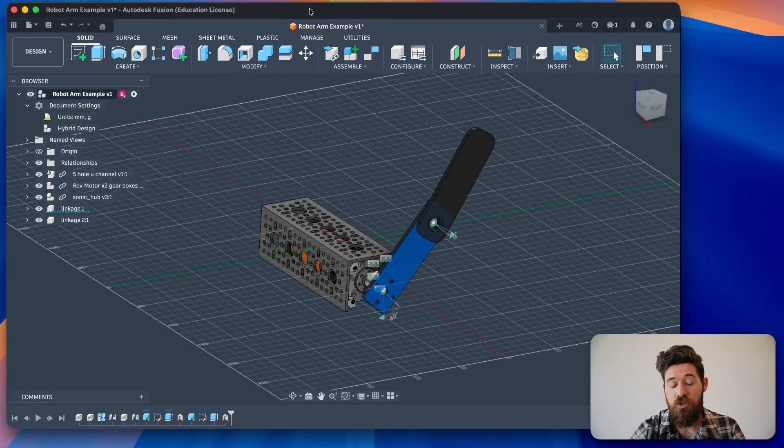So the goal for today is to be able to make something along these lines, and how these components are interacting together are working with things called joints inside of Fusion.

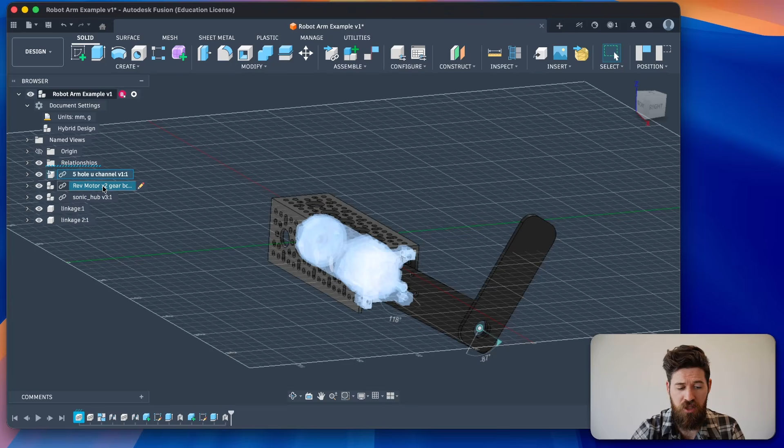So if we're looking at our design here, we can see that there's a couple different joints that already exist inside of our design. Inside of our browser panel, we have a metal piece here that holds the whole frame together. We have a motor that's able to rotate things around. We have a hub-based element here that is able to clamp our first bar of that linkage and then connect to that second bar of that linkage.

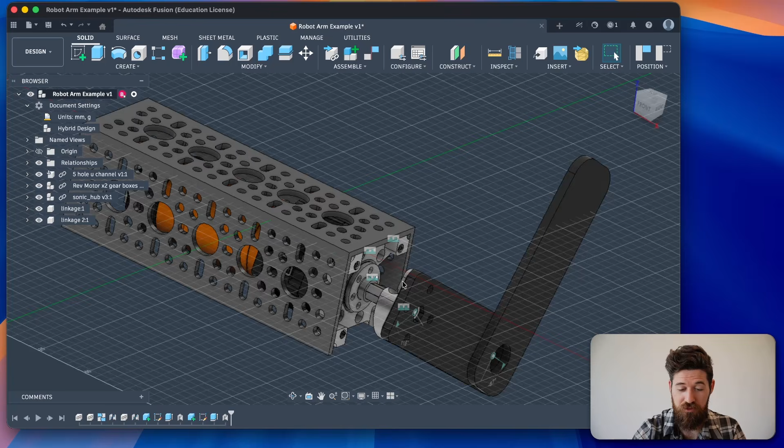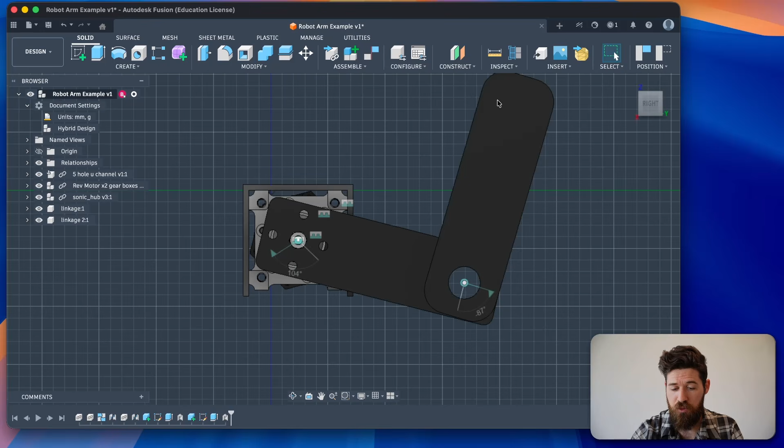Now, these components here are connected with something called a revolute joint, or a rotational joint. And we can see that when we look at our position here, we can see our angle for our revolute joint. As we rotate this around, we can see that little angle number changes as we rotate around that joint. The same is true with our other revolute joint here, where we can click and drag this around, and we can see again that angle changes depending on how those two are connected together.

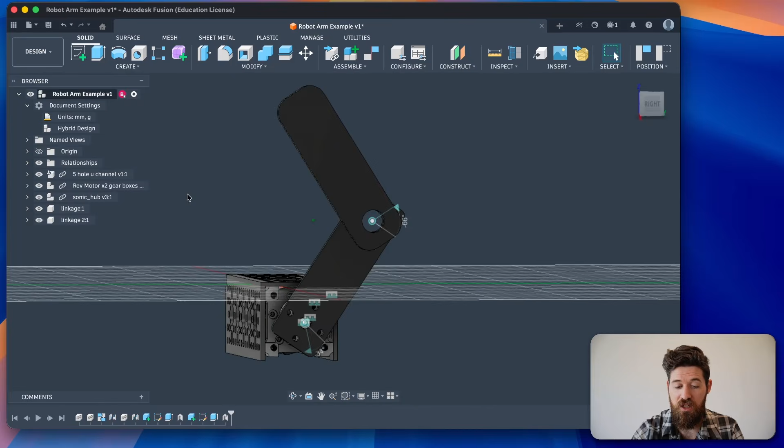Now, because I have two revolute joints and we move this together, we can actually see, and Fusion will model for us, how these two objects are going to connect together if I were to keep these things inside of this main plane. You'll also notice as I rotate this around that this sonic hub right here in the middle also stays and rotates as I rotate that top joint.

So let's talk about how we actually move this. The first thing to know about working with joints and components as you start to make larger assemblies is that you always have to have some sort of component that is grounded.

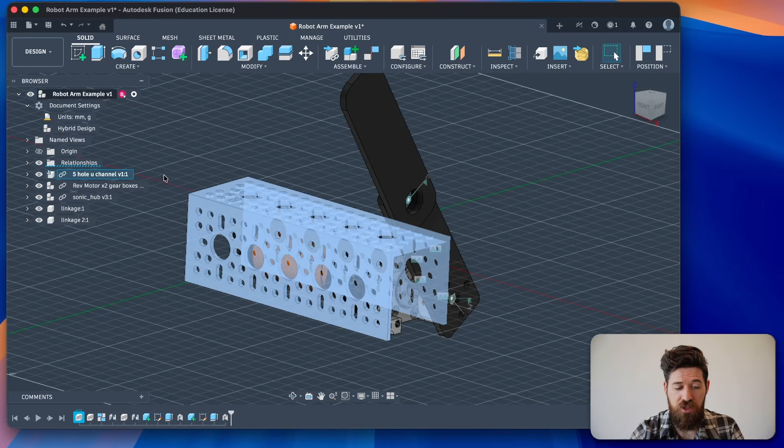You'll notice that there's this little anchor symbol next to this U-channel piece. This piece of metal, which is our U or C channel, is grounded, which means that if I were to click my little home here, there is one piece that will never move, and that is the parent object, so to speak. We will never be able to move that object around, and everything is going to rotate and move relative to that grounded object that will never actually move. So you always have to have something grounded inside of your object or your assembly.

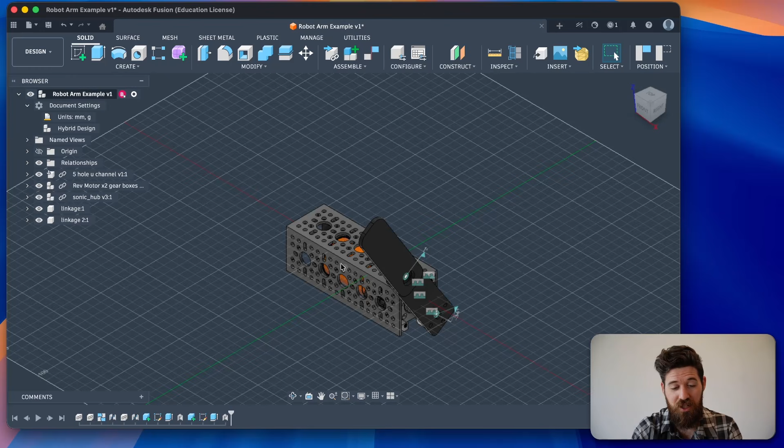The next thing to know about this is that all of your objects also need to be components. You cannot add joints to simple bodies, so we have to make sure we're adding those as components instead.

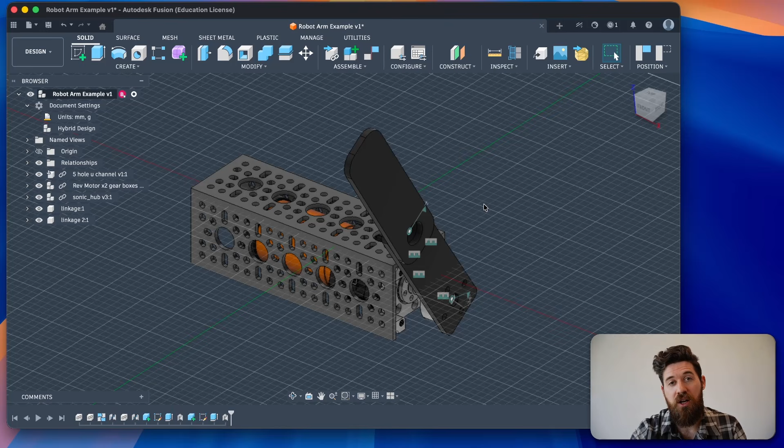So let's go ahead and start making some of these. If you want all these files for these individual step files, I'll link them in a file in the description down below so that you can build along with me here too.

I'm going to start by making a new design, and we're going to make a hybrid design because in this case we are not making an individual part, we're not assembling pre-built parts, we're also going to be building some of these. This is kind of classic Fusion design as well. We'll go ahead and save this first. We'll call this one a simple robot linkage, and I'm going to write a tutorial in this as well, just to make sure we got some good practice.

Now the first thing we're going to do is add in that solid piece of U-channel, and we're going to ground that inside. So I have it inside of my panel here, and I'm going to search for U-channel.

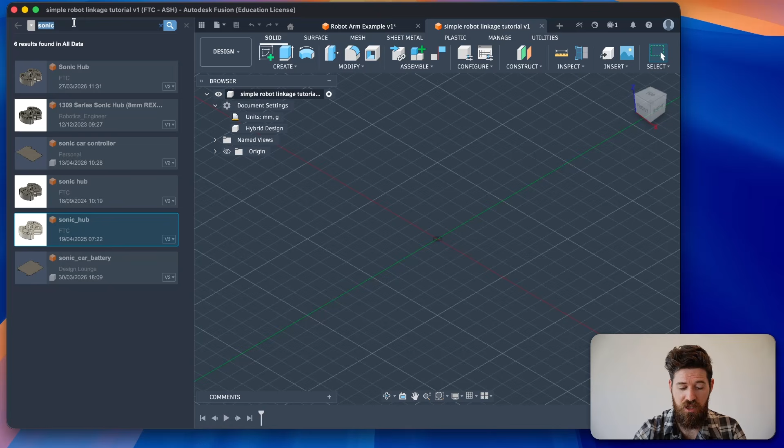You can simply do File and then select Open, and then save your file as a separate file here, and it will show up inside of one of those sections. Then we can right click and select Insert into Current Design. That will take one of those external components or previous components that we've made, and it will insert it into our object here.

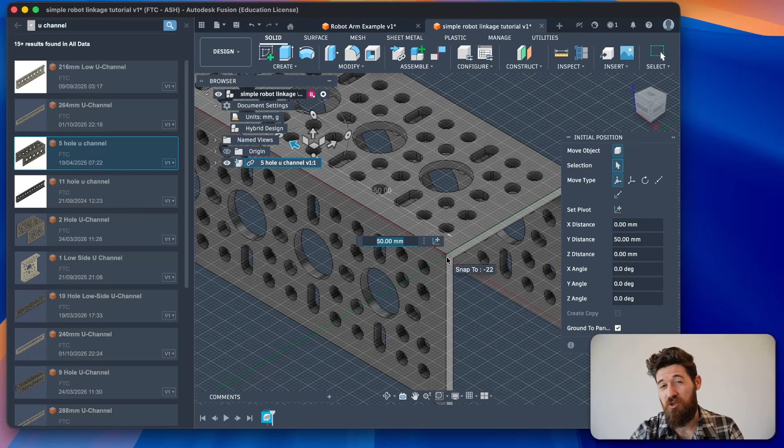You're welcome to go ahead and move this around as you'd like to get it inside of your current position. There are 3 slider bars here for the Y-axis, the Z-axis, and the X-axis, and you're welcome to move this as you see fit. I like to line my first component up on the origin point here so that I have that central point moving forward. The closer you zoom in, the smaller increments you'll be able to move your objects in, and the further out you zoom, the larger the increments are going to be that you're moving your object in.

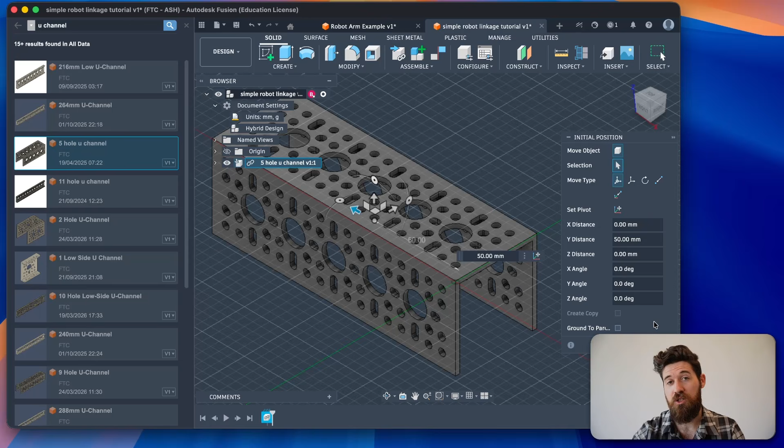Once you're happy with this, in our initial position, we can also simply ground this to the parent, but I'm going to not select that box for now. I'd suggest that you do, but on the off chance that you don't end up grounding this parent, and you're now able to move this thing around, instead what you can do now is select your object, select whatever face it is that you wanted to, and then right click on the object and say ground to parent.

And that will hold it inside of that specific position that you want. And now if I try to click and drag this around, you'll notice that I cannot move or manipulate this object anymore, which is what we want. So this is our base reference point for our design. It's up to you to decide what you want your base reference to be.

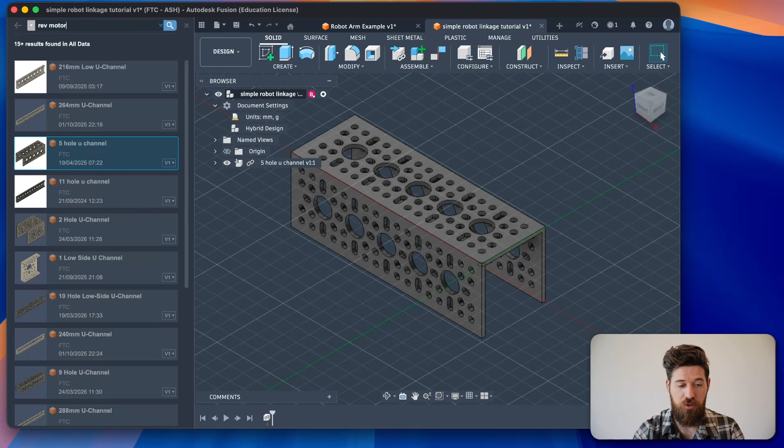Now inside of this piece of channel here, we're also going to add in a motor. So I'm going to search for my rev motor, because this is what I've put in the files down below. I'm going to grab this one here, and right click and insert into the current design. Again, if you haven't uploaded that folder, make sure you do that file upload to the folder. And for this one, we can just move it clear and out of the way for now.

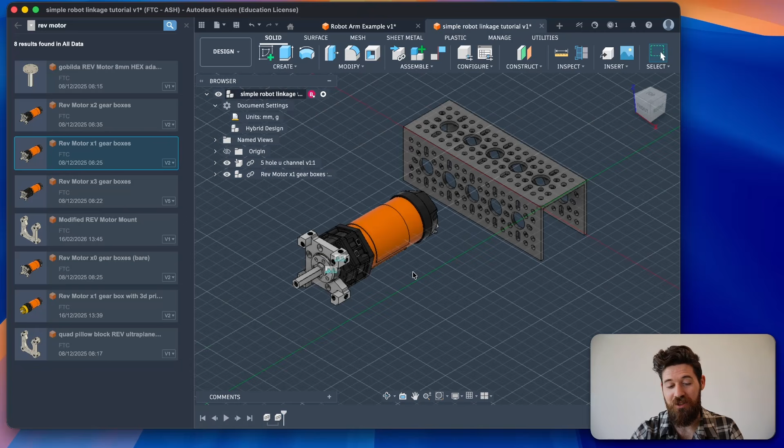And we're going to make sure we do not select ground to parent, because otherwise it will ground it inside of this position. Now before we start moving a very large object like this - this object has a whole lot of pieces in it - and for our example in this design, none of the pieces on this motor here are actually going to move.

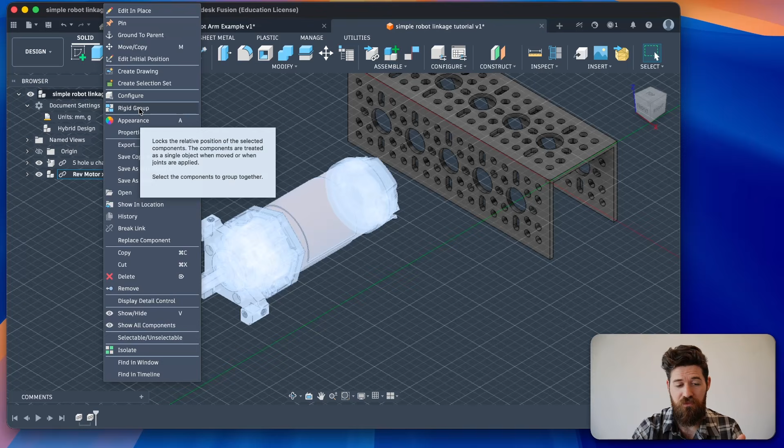So before I move this in, I'm going to right click, and select rigid group. Now what a rigid group does is it locks all of those joints and all those individual pieces inside of that component together so that they don't move around. What ends up happening is it's going to constrain selected components - this is okay, select yes, and then select all right. So now this entire component now acts as an individual object.

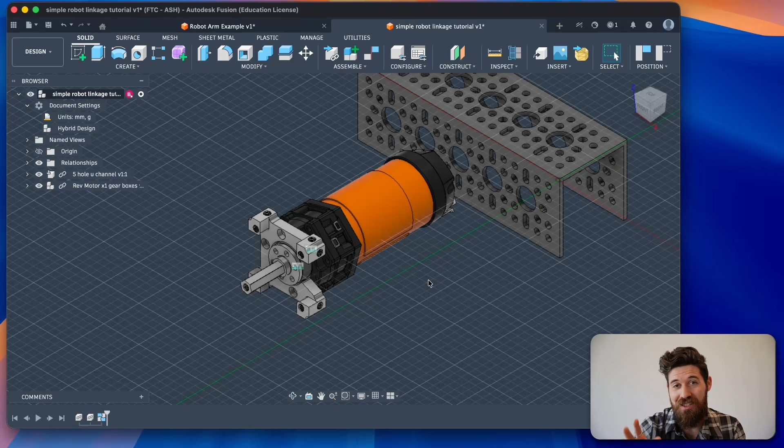If you did not make it a rigid group and you were to start adding in joints and relative geometry to these things, what's going to happen is that you're going to move individual pieces from that. So for example, you might grab just this drive shaft, or you might grab just this cap, and you'll end up blowing apart your component, which is not what we want.

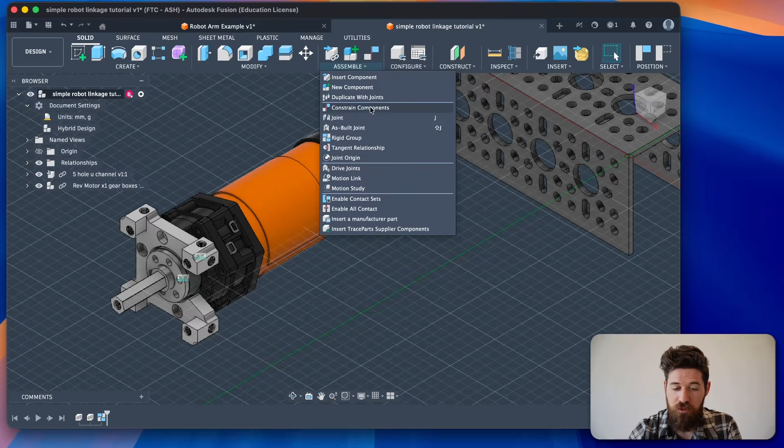Now let's get into joining these two pieces together. We want some way of relatively moving these things together at the same time, and we're going to do that with a simple joint. So if I select Assemble and I select Joint, you can also press J on your keyboard to open that up. Now we can actually start finding ways to join things together. We can join things on faces, we can join things on points, we can join things on edges. We can also join things on snap geometries, and we'll talk about all of those.

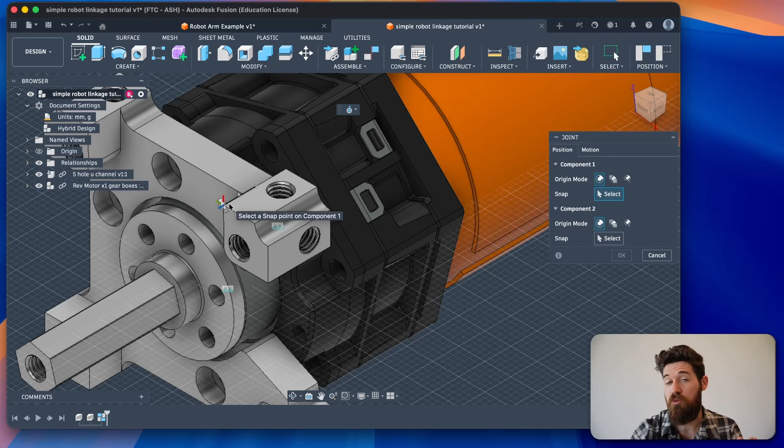So let's say, for example, I wanted to join this face here onto another face. I'm just going to select this face, and we can see that there's this little snap point origin that's popping up, because Fusion is smart enough to know that you probably want some sort of reference point on your geometry for where you want to actually do that joint. So I'm going to select this top left-hand corner. It's going to keep it in this orientation. And then I can move over and select a different position that I want it to snap to.

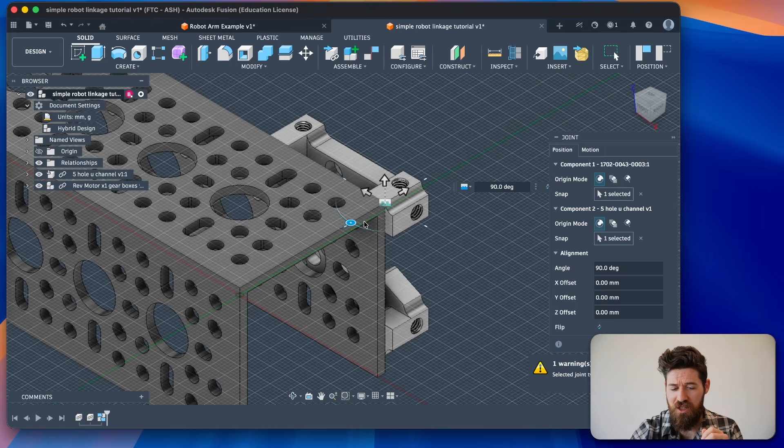We can see that right now, mine is currently doing a revolute joint, so I'm going to swap this back to rigid. Yours is likely going to be rigid at the start, we'll talk about that in a second. So now as I move this in, we can see that I can actually rotate and move this joint around as it is that I want to.

You can also have joints move in different positions. Now, in this case, I actually don't want to snap those two together, so I'm going to remove both of those because there's an easier way for me to joint these two together. I'm going to select one of these holes here because these are lined up with my pattern.

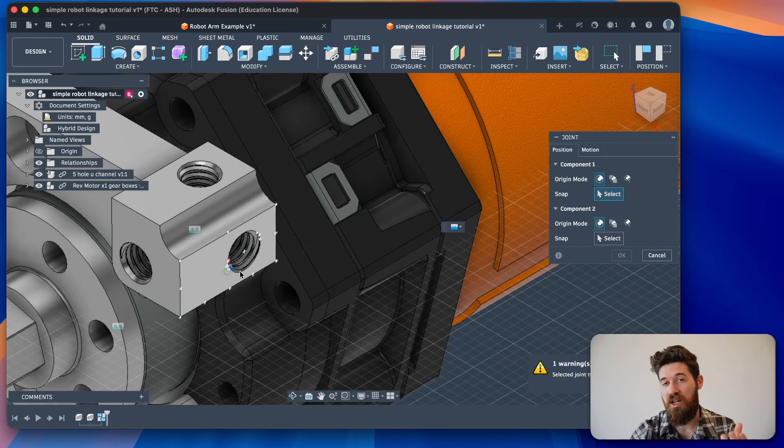And if I select the edge of this ring here, or this circle, what ends up happening is you can see that rather than grabbing one of these threads, I can move it over, and we actually see that snap origin point goes into the center of that hole, which is what I want. I like to work center to center, it makes life a lot easier.

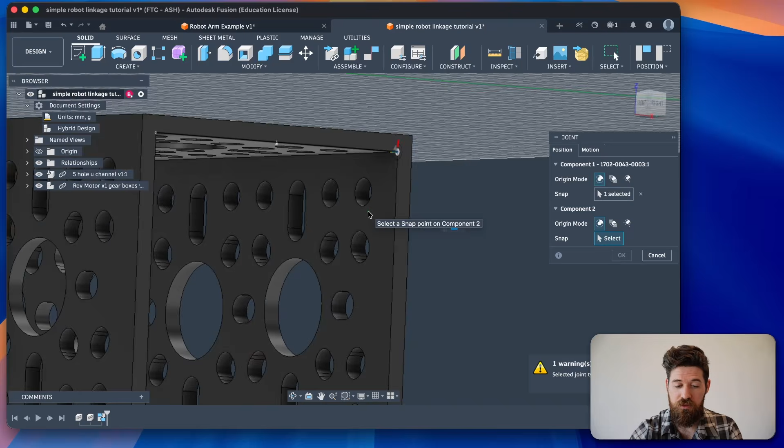Now if I come over here, I change my view angle, and I select, again, the center of this hole here by grabbing this edge. You may need to move your mouse around, or you can click and hold, and you can select different sections until you have the point that you would like to select to. And this is, I'm pretty happy with where this is actually going to go. You'll notice that it's only going to move that individual component for now, and that's okay. The whole rigid group is going to come on with it later.

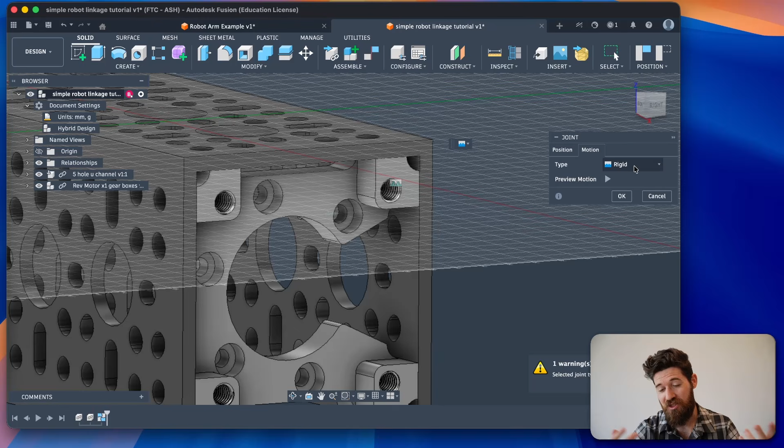Now when it comes to the motion, I'm going to select motion, I'm going to select rigid. Rigid is they're going to lock the two components together because those are never actually going to move, because we're going to add some fasteners in here later. They're never going to move. You can click this little preview and it will show you that, hey, those two objects, if you were to shake and vibrate them all around, they're never going to move. We don't have to worry about any of this alignment stuff.

We can go ahead and flip this so it goes on the other side, but we've selected the correct object, and we can see that once we select OK, the rest of the object moves along with it. Now, the next part we're going to add is we're going to add in a rotating hub to the end of this. So I'm going to search for my sonic hub here.

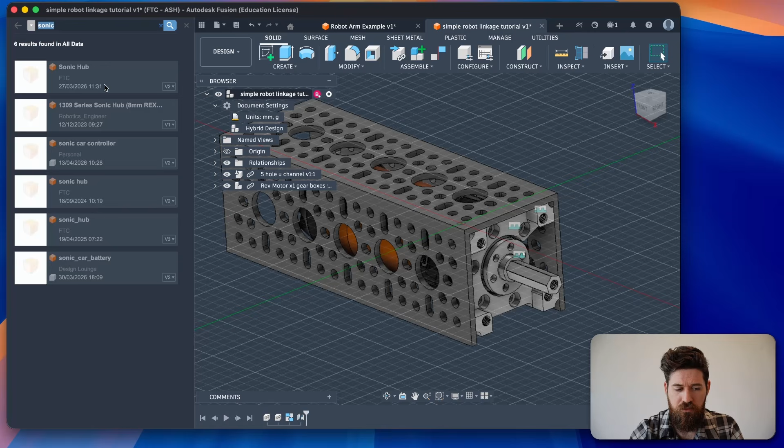And I'm going to insert this into my current design as well. Feel free to move this wherever you want once you actually insert it into the design—it doesn't matter. I like to just move it out of the way for now.

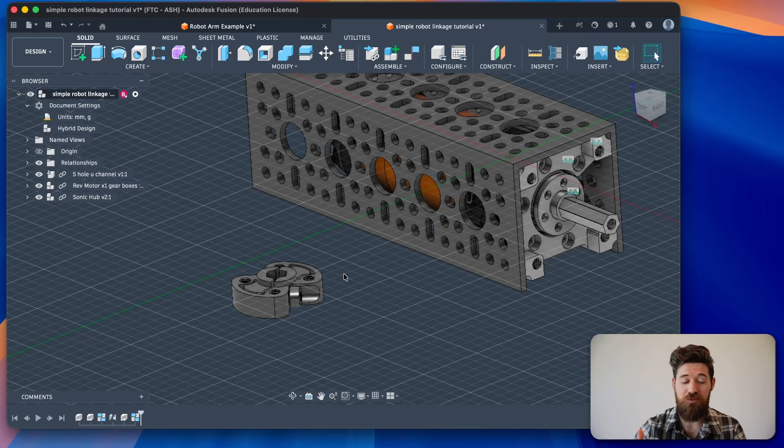Make sure I have ground deselected. I'm going to right click and set this as a rigid group, because otherwise what can happen is I will move those individual components, since this has multiple bolts inside of it. We don't want these moving outside.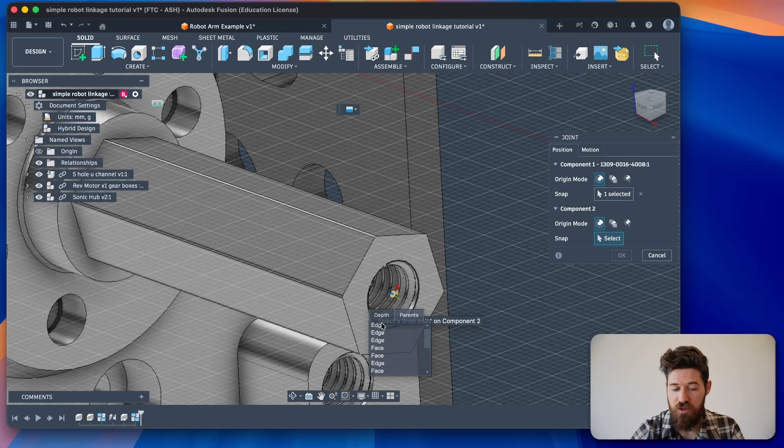Now again, we're going to grab a joint. I'm going to select J on my keyboard to open up a joint, and I'm going to grab this edge here on the outside of this circle so I can snap to that center point in the middle of that ring. Select that. We'll come over to the edge of our motor shaft, and I'm going to select this axle. Again, you can move it or click and hold until you can select the edge you actually want to center on. I like the center of this edge.

Now for this component, we are not going to make it a rigid component. Instead, I'm going to select motion, and I'm going to select revolute. This allows it to rotate around in a full 360 degrees. You can also select preview.

Now, there are also joint motion limits. If you want to get fancy, you can set a minimum of 90 degrees, so when you try to rotate this around, it won't actually rotate beyond specific sections anymore. You can rotate it, say, between 90 and 220 degrees, and now the rotation will only move within that range, no longer capable of moving all the way around. But in our case, because this is a simple motor, it's going to move all the way around.

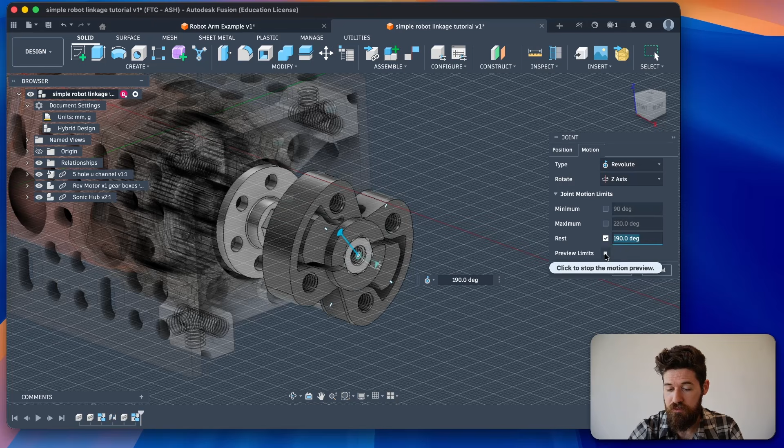You can also have it rest at a specific position, where you say where you'd like this object to rest. So if you want it to rest at 190 degrees, it will stay there in a resting position. You can give it a preview, and that's where its start and stop positions are going to be. I'll stop that and select OK on that preview.

Now, up to this point, if I click and drag things around, I can click and drag and rotate around this revolute joint. When I let go, it automatically snaps itself back to rest because I added that rest position.

I'm going to go ahead and modify that relationship. If I come down to this browser under relationships and joints, you'll notice I have several different joints in here. Before I get too far, I'm going to rename these. So this rigid joint, I'm going to rename—I always like to rename the object being jointed to whatever its first parent is. So in this case, it's the motor to the U channel.

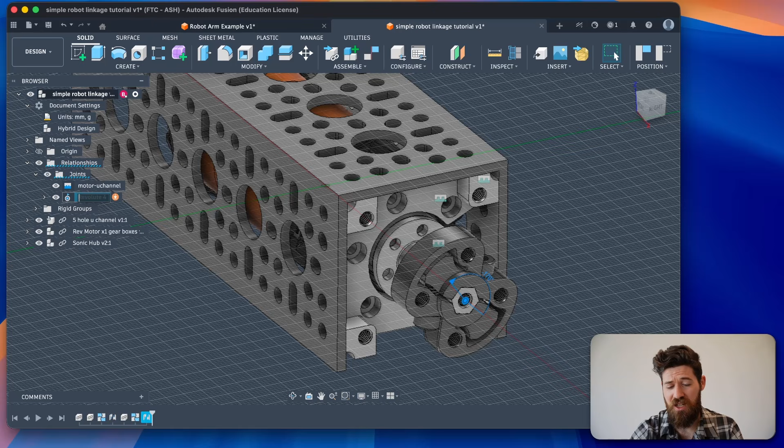And this revolute joint here, I'm going to rename—I might give it an R, but actually we don't even need to since it already has revolute on there. This is the sonic to the motor, or the hub to the motor. This is just good practice.

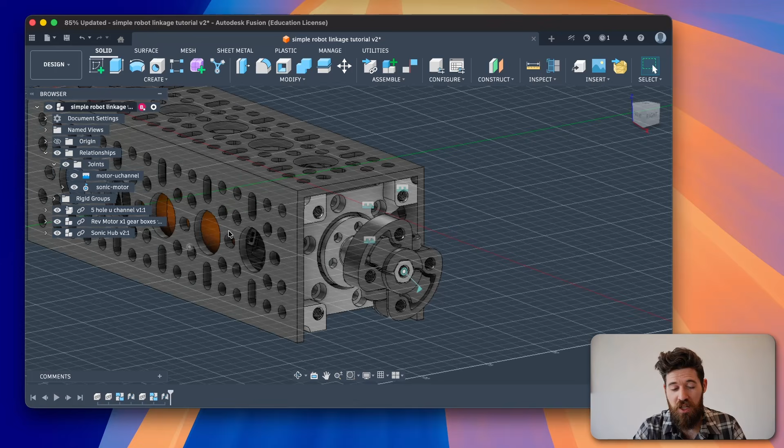If I open this up, I can now edit this rotate if I wanted to. I can either lock this so it doesn't move, or click this little arrow to edit those motions. I'm going to remove that rest so it stays at its current position. So we'll modify that. Now I'm actually going to go back and put that rest back on, because we're about to make that first linkage and we want some reference points from this geometry.

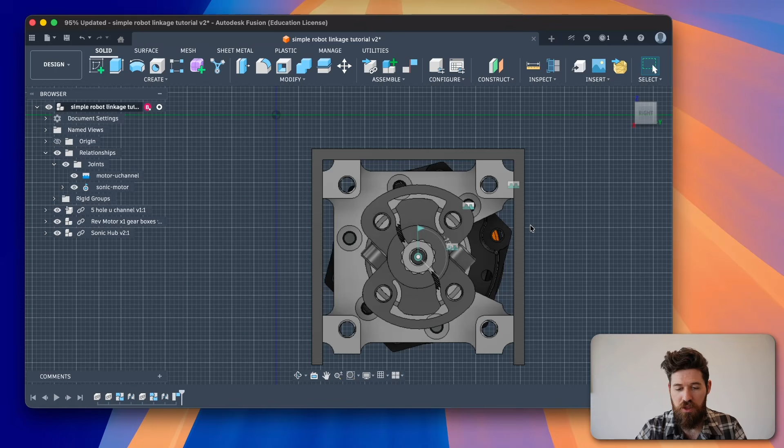So now we're going to make that linkage. Let's right click and make a new component. We're going to call this component Linkage 1.

And then we're going to make a new sketch on the face of this mounting hub we did. So we can click and hold until we select the face that we actually do want to draw our sketch on top of.

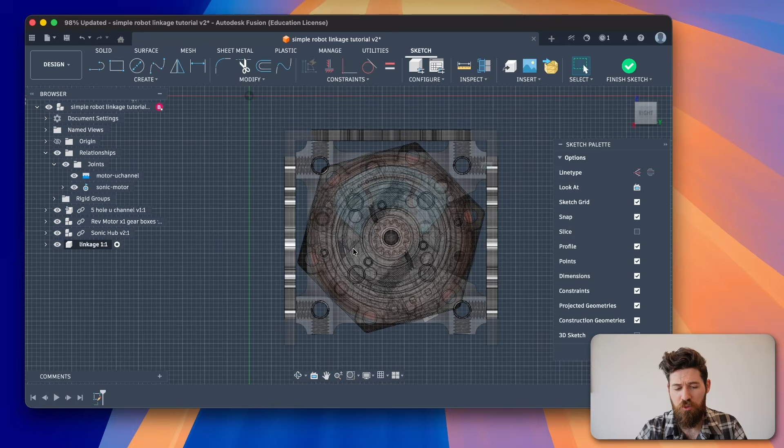And then we're going to make a couple quick projection lines just so we can know where our holes need to be. So I'll press P on my keyboard to project. I'll project this face, I'll project this face, and then I'll also project the hexagon input of our motor as well.

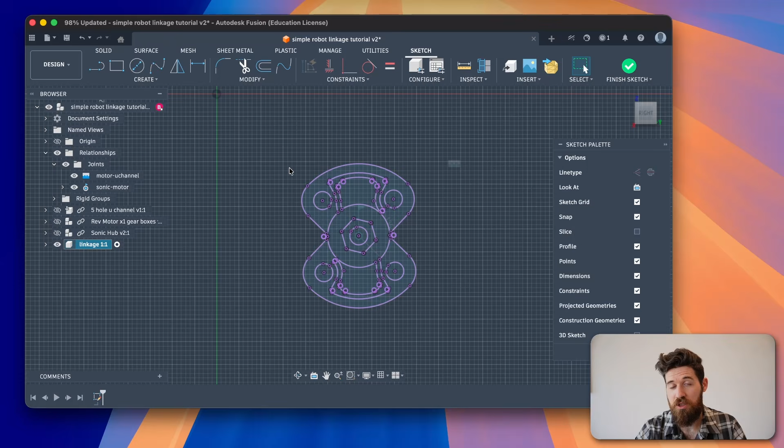We'll select OK. And now, so that we don't have such a busy workspace, we can right-click on our linkage, select Isolate, and it will just hide everything else for now so we don't have such a visually busy piece. We'll now grab a rectangle and just click and drag to make something large with no reference geometry.

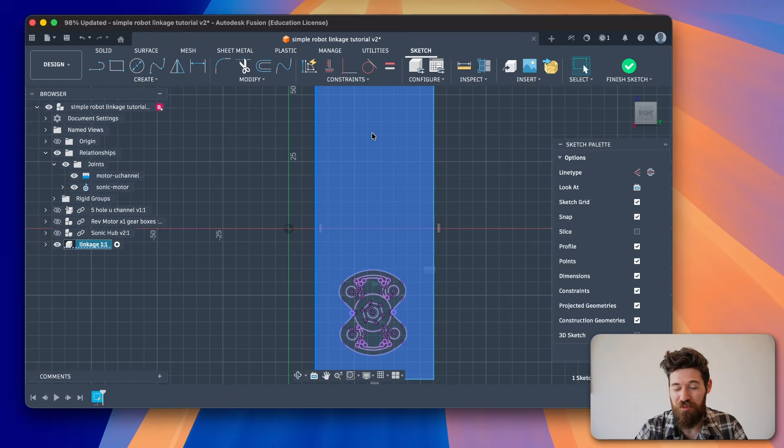We don't worry about where anything is right now. We'll use a couple tangent constraints just to hold everything in, or honestly we can just leave this overly large, and that's also totally okay at this point because we're not doing a full sketch here. We'll make a circle, imagine we have some sort of ball bearing or some sort of constraining place for that circle to then pull itself on, and we'll go ahead and finish this sketch.

Decided here, we can go ahead and select Extrude, and we'll grab all the faces that we'd like to extrude, and we'll extrude out 4 millimeters. At this point, we can go ahead and unisolate this.

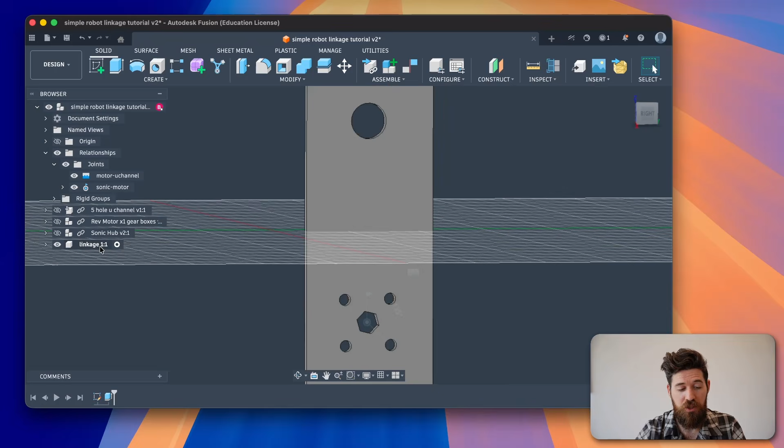And we've now seeing everything back. And now to be able to mate these two components together, both that hub and that main face, we have to go ahead and make our main assembly our active component, or the parent component of what components we're actually working on in this case.

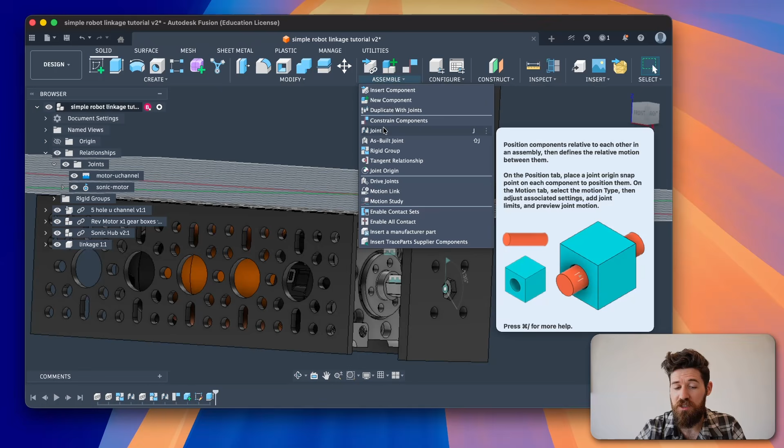So now I can select Assemble, and instead of selecting Joint, we're actually going to do an As-Built joint. The difference between an as-built joint and a standard joint is that with those joints, we are mating the two pieces together. But with an as-built joint, we're taking them as they are built or assembled in place.

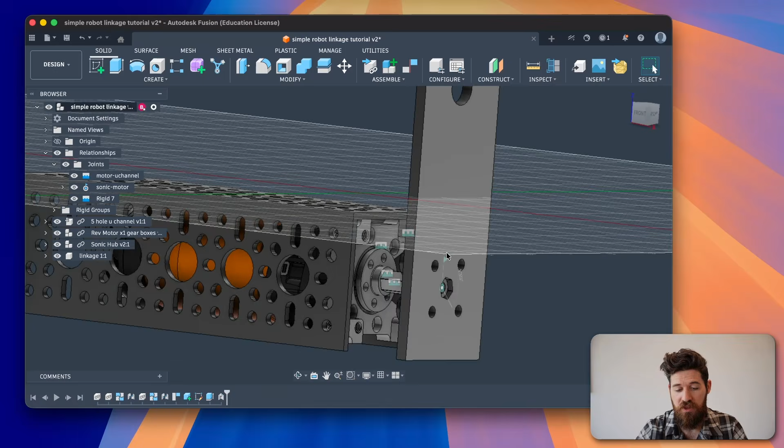So we can go ahead and select these two, and this is going to be a rigid component. And now we'll see that as we click and rotate these around, that both components move together. So we can see that both that hub is now rotating and that main piece is now rotating.

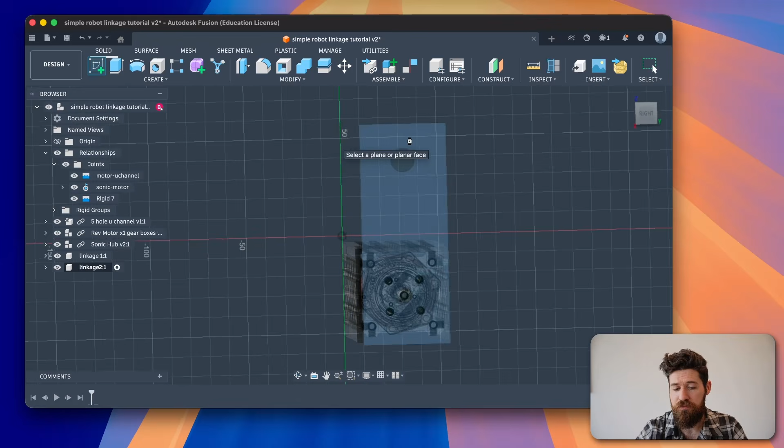So we'll go ahead and make one more component here. We're going to call this one linkage number 2. We'll make a new sketch on top of the main face. And again, we're not super concerned about making this a really fancy sketch or anything, so I'm just going to add in another large bar and we'll finish our sketch.

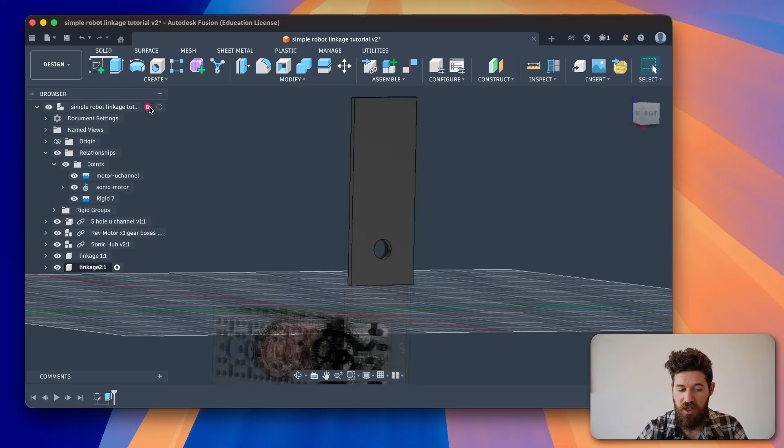We can select Extrude, or press E or Q on our keyboard. We'll extrude these both out and make it 4 millimeters. Now, in order for these two to come back together, you can probably guess we're going to make our main component the active component again. And then we're going to assemble and select an as-built joint.

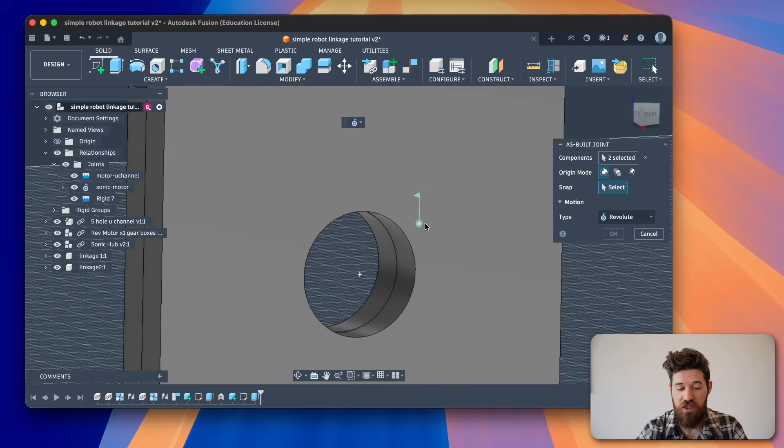We'll select our two components, but this time, instead of rigid, we're going to select revolute. And the revolute also expects where that snap is going to be. So we zoom in here, and that snap is basically where these two components are going to be rotating relative to each other. So I'm going to make this center as my revolution point.

I'll make it a full 360 because we aren't going to constrain these for where they're going to be. We'll select OK. And now as we click and rotate, we can move these individual joints, and we can move both joints at the same time.

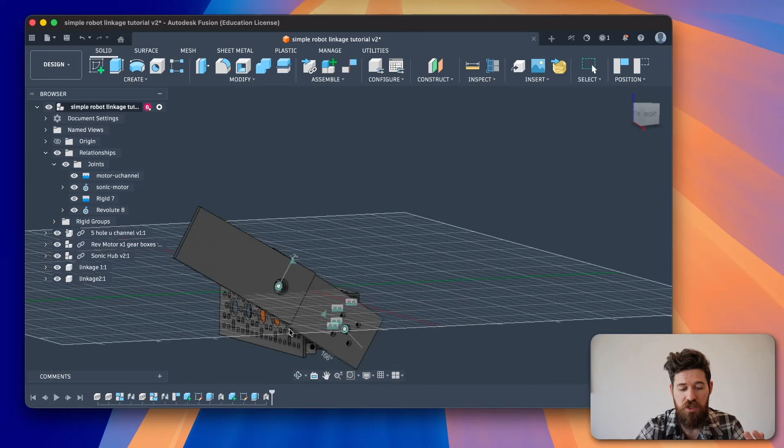Now you'll notice as I rotate this joint around, this other joint is not moving. It's because it's currently at rest. So if I were to remove that rest from that other joint, we can now have both of them moving together independently.

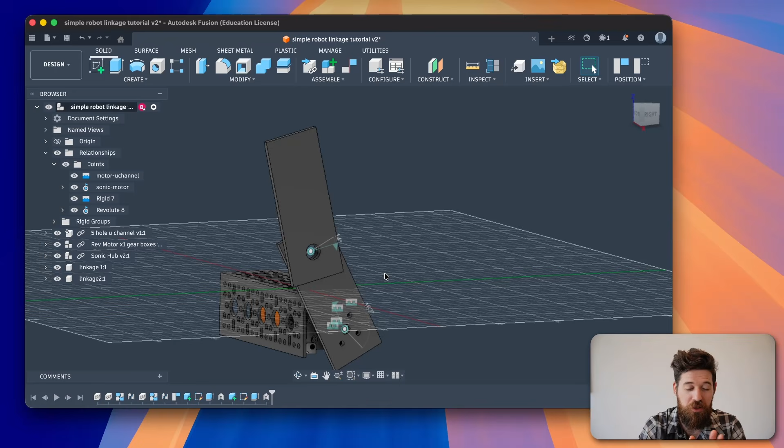So I hope that you find that that helps speed up some of your Fusion designs with moving components around, marrying components together, as well as starting to get in the capacity for some things like some motion studies. If you got any more questions, let me know in the comments down below.